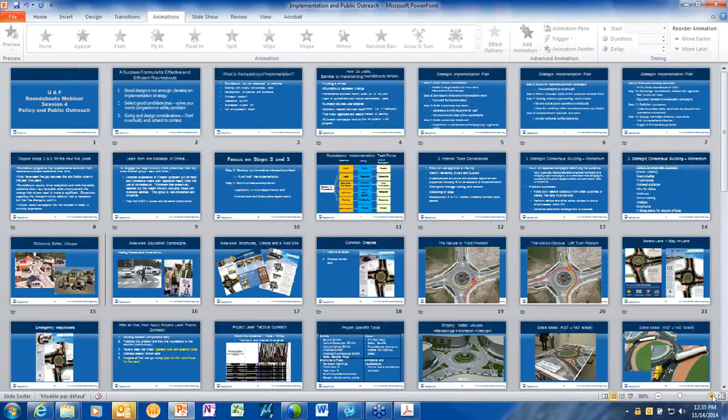I just know we had a project here, DOT did, that a local city council person kind of led the charge against. It wasn't a roundabout or anything, but he definitely swayed public opinion and got the project severely changed. You know, it wasn't good.

What would you do differently if you were the project champion? I probably would have gotten fired. Hearing some of the comments he made at public meetings, I think I would not have been able to hold my tongue.

But as you can see from this, there's ways to avoid this. No, some of your strategies - I mean, I wasn't involved in the process. This was just a DOT project and a different firm, but you saw a lot of articles in the newspapers, so I don't know exactly what they did.

It's not a large group, really, they're not just stakeholders, they're our masters. And if they're not on board with it, and they don't understand it, or they can't be your champion, then you're really pretty much on your own.

I had a public meeting, well, I won't say where it was. We went loaded with a robust toolbox. We had all the tools, brochures, videos, animations, photos, examples of sites, success stories, and we actually never got to speak. I had the microphone in my hands, but by that time the meeting had moved on, and I was supposed to get up and present on details of roundabouts, and I never got to speak.

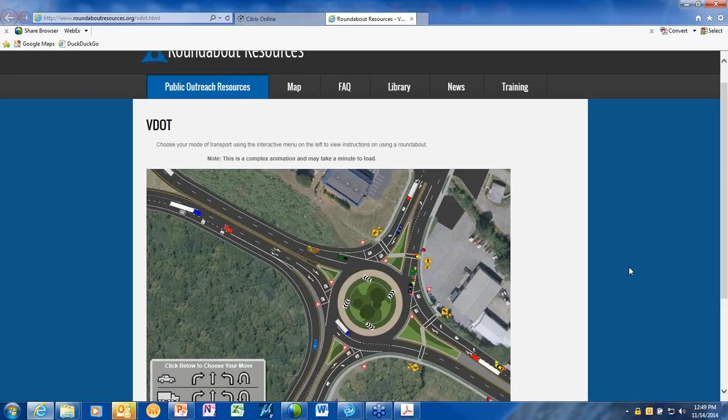We developed a website called Roundabout Resources. This is set up for Virginia DOT. It's an animation, done in Flash, and you can pick any turning movement. Let's pick the car making the left turn.

Some instructions: there comes our vehicle, he's in the left — oh, he has to get into the left lane. Pavement markings show what lane to choose. Yield to all traffic, don't enter beside a driver in the roundabout, stay in your lane, signal right to exit, yield to pedestrians.

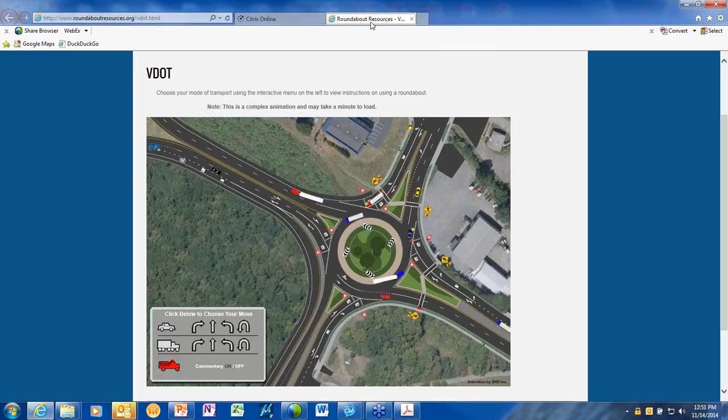So they can be fairly sophisticated. I'm just going to look at what other resources we have. These flash animations can be customized to different layouts of a roundabout: 5 legs, 4 legs, 2-lane entries, single lanes, bypass lanes. I'll maybe stop and just look at a couple of these things.

So these tools — oh, I don't have the password. We have a virtual public meeting, and it's essentially the same thing you would do in a public meeting, just all done virtually. I'll show you in a minute some of the brochures.

Turn by turn, lane choice, trucks, school buses, emergency vehicles, pedestrians, bicyclists, general information on acceptance. This material has to be well crafted and easy to read — designing it as though an engineer is going to read it is not good. It has to be simple, so the average motorist can look at the simple turning movements: right lane for right turns and throughs, left lane for U-turns, lefts and throughs. Always obey the signs — just a simple message, turn by turn.

Some of the things that websites can have as well — let's see if I can find it here — some visualizations, and I think all of you have seen these. It flips to YouTube. These are helpful at the public meeting as well as agency-wide to help people understand how roundabouts work, when they're complicated, like at an interchange.

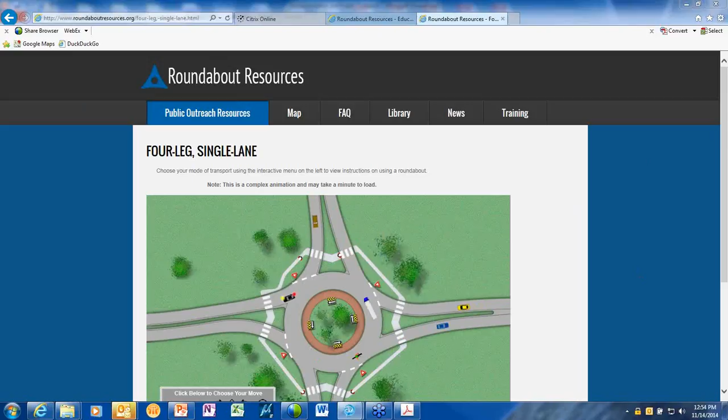Shouldn't happen if you use a road mark. Let's see if I can bring this animation back up. Well, that's not a multi-lane, that's a single lane—let's go back to the one we had. So a two-lane entry, driver's in the inside lane, driver beside them, both exiting simultaneously.

I'm not sure I understood the question. So, Mark, I think what Charles is asking is in the situation where you've got somebody on the inside lane of a two-lane roundabout who wants to exit, and the person in the outer lane is making a through movement, effectively blocking that person in the inner lane from exiting.

Well, if both drivers can make a through movement, then there should be two lanes corresponding on the exit, unless the inside lane is left-only, in which case there could be a single lane exiting. But roundabouts have to adhere to the rules of lane continuity. If there's two through lanes marked and physically present on the approach, then there have to be two lanes circulating and two lanes exiting. The only time we'll see a different condition is—let me see if I can pull some of these others up.

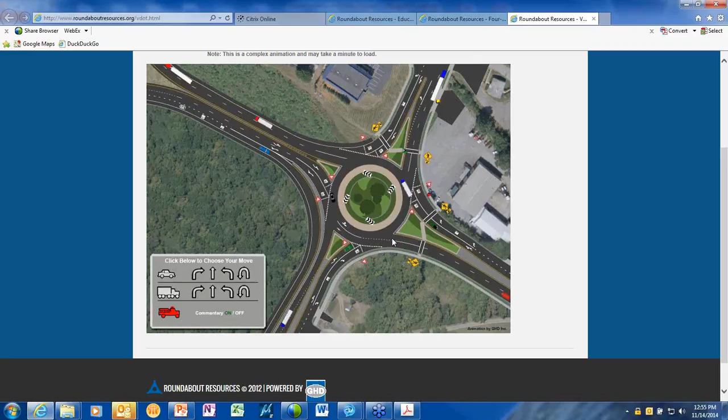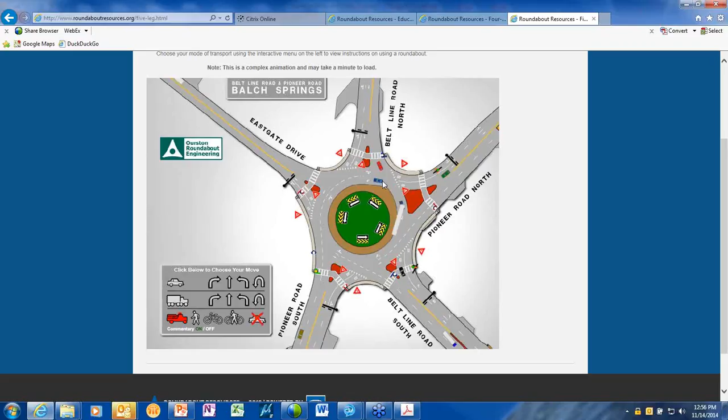I'm not sure this one's going to come up, but it's a five-leg that has not only consecutive lefts, but—here it is—the idea that there might be a two-lane entry and a single-lane exit. This was for a site in Texas when I was at Ourston a couple of years ago; we later merged into GHD. You can see that with the use of the spiral, there can be a driver in the right lane—that's actually a right-only—and the left lane can go through and exit, or go around and exit one of the other legs.

Two-lane entries from one leg can feed to two lanes circulating and two lanes exiting. But it's really important that the driver in the right lane not try to make a left turn, and the markings help to reinforce that.

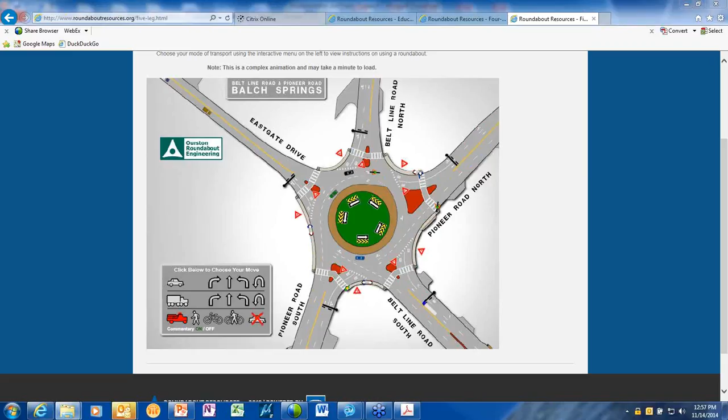I think what Charles was getting at, Mark, is someone who inappropriately makes either a left or a through movement in a two-lane roundabout by choosing that outside lane. It happened quite often—I grew up close to Augusta, Maine, which has two of what used to be called rotaries, and it would happen all the time. Somebody would be in that outside lane continuing through, and somebody on the inside lane wanted to exit. Either that person is forced to circle around the roadway again, or they slam on the brakes, come to a stop, and then try to accelerate their way out of the roundabout.

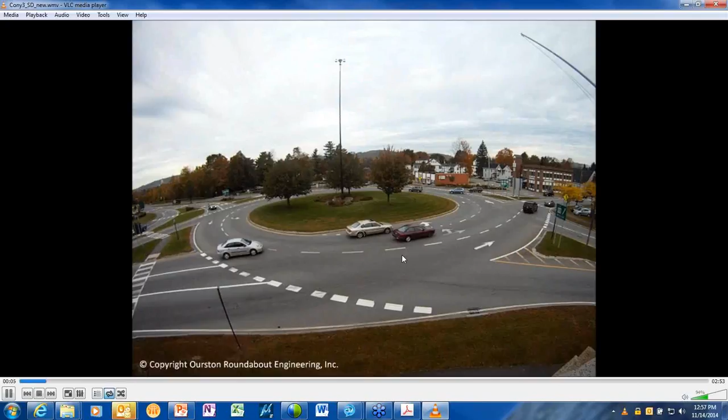Okay, that's the one, Cony Circle, Maine. This was an unconventional rotary or traffic circle with no pavement marking and striping, and what marking it did have was not uniform with approach lane designation and exit lane continuity. In this case, you can see a left turn, left-only, where the inside lane is going to exit either at Stone or—I can't remember—Cony.

This is Memorial across the bridge, and these two lanes take them through. The driver can't make a left from the right lane without crossing the lane line—that's possible to do, but they have to turn signal. This is a double left, so this driver came from the inside lane and they're spiraling out. There's a spiral, this paint mark spirals them out to the exit.

Now trucks do pretty much what they want. They're big. That's a common scene, cars stopping in the entry for a truck. It's so difficult for them to start up, and once they get started, by that time 3 or 4 vehicles have come around. They had a gap when they began, and there's none after they entered.

So the striping should be educational, but designs like this require a lot of community outreach.

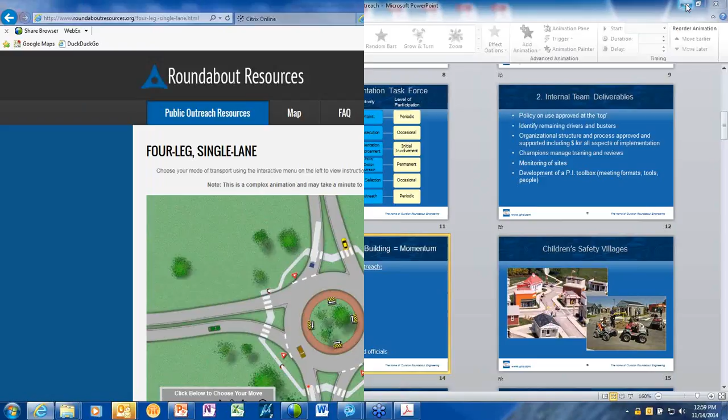So there's a lot of education material. We'll talk a bit more about that. I'll just leave that website up and running for now. So we were talking about the tools of public outreach.

All these things can be posted to websites, and they can be reused at the public meeting. The brochures can be pulled off, printed, and distributed. You can prepare talking points, bulletins for elected officials, the kind of thing that precedes the meeting, so they know what to expect when they come. Don't take that for granted.

They won't admit it. This one's kind of novel—the idea of a safety village, but instead of teaching children how to cross at signals like these safety villages do, it's putting them in little ATVs and getting them to go around the roundabout.

This is actually the same intersection that's been converted to a roundabout. It happens to be in Canada.

The other idea of an area-wide campaign is to make pedestrians more assertive. In our last session, we talked about pedestrian safety and the idea of being assertive. So the photo on the left is of a councilor, and all of the council was put on a bus, taken out to 5 or 6 multi-lane roundabouts, and they were taught to cross by pointing their hand. Some of them tried to cross without pointing and they couldn't get a gap. As soon as they raised their arm, things changed.

Over in Loveland, Colorado, they had a Look at Me and Look Smart campaign. Kids were learning—this was not roundabouts, but just all crosswalks.

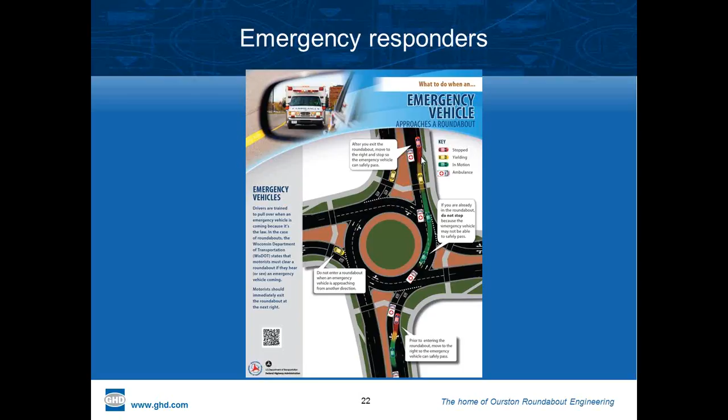Emergency responders and how drivers should behave: they should exit the roundabout and pull to the right, let the ambulance go through. The ambulance driver should anticipate that that's how they're going to do it. So there's some education, really, not just for the responders, but the rest of us.

Once we've got some of that area-wide outreach and the campaign is underway and things are on the website and we're ready to go, we want to start by developing the project components early.

So Tom was gracious to share his upcoming experiences, and so you can ask questions about how well informed the legislators are, how well informed the rest of the department is, who's the champion, how many champions can you bring with you.

Publicizing the problem at the intersection, whether it's congestion or safety, is important to do continuously throughout the outreach process—the first meeting and the last meeting, before construction and after construction. So you can remind people of what would have happened with the alternative control and what would have happened without any change in control.

Have lots of tools—general tools, area-wide type tools, and then project-specific. Remember the storm cells? Poorly operating roundabouts need to be addressed before you go to the next meeting. Otherwise, they dump on you for the last roundabout and don't let you do the next one. Plan for the worst, hope for the best.

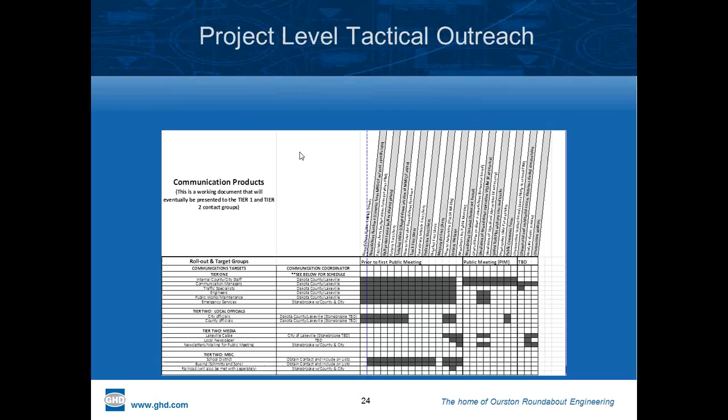So the tactical level, project level outreach is about matching the audience, the tools, and the timing. There's certain tools across the top, everything from brochures to animations to public handouts to television spots and newspaper press releases. Each of these has a proper place and a proper time.

So if we start with the audience of elected officials who need to be informed to give us the authority to do this, then we put certain information in their hands. Then you begin to build momentum top-down through the media, because they'll print news if you don't give it to them, and down into what we call tier 1, 2, and 3.

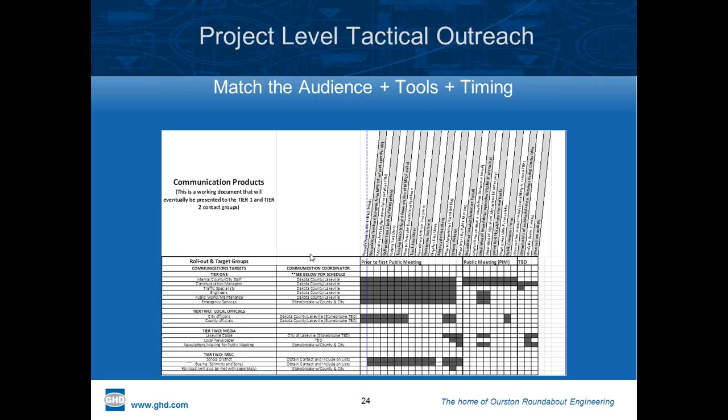General public is the last audience to be reached. Everyone else has to be engaged before that. That's a very effective top-down and internal-to-external approach.

Here's your project-specific tools that you bring to the meeting: exhibits, videos, animations, brochures, how-to guides, crash exhibits showing what types of crashes can occur, some statistics from the Insurance Institute and videos from them, things that give you area-wide or statewide benefits of roundabouts based on publicized before-and-after studies, how to use a roundabout, flash animations and visualizations.

Your toolbox is full if you've got all these ready to go. But without the authority to do what you're doing and the support and momentum—we've gone to meetings with all of this and still failed. So we said it wasn't for lack of information that we didn't get to where we were going.

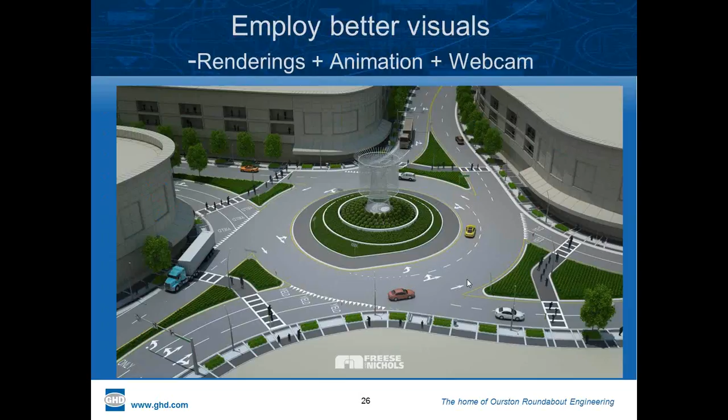So use better visuals and animations. This is a photo rendering of a future intersection with 3-lane entries in Fort Worth, Texas—a big roundabout plan. You're concerned about pedestrians, and they should be. 3-lane entries, it's tough to cross.

Use a scale model. This just happens to correspond to scale model cars and trucks that fit the railroad scale of HO model railroad, 1:87. We plot it in paper or vinyl, and then we have the ability to actually see the space of the scale model within the roundabout. That has helped our truck driving community so much—we don't go to a meeting without one of these.

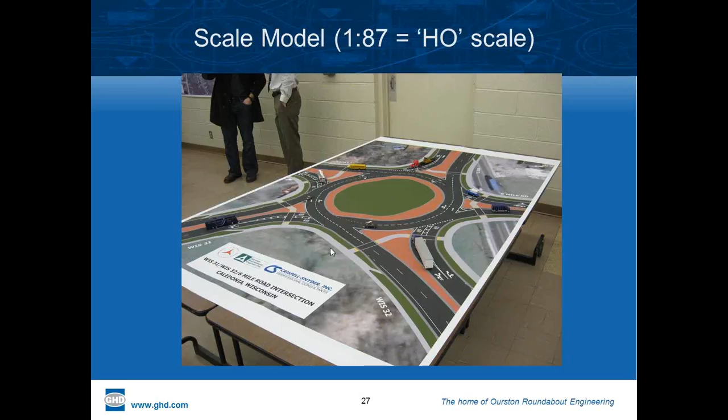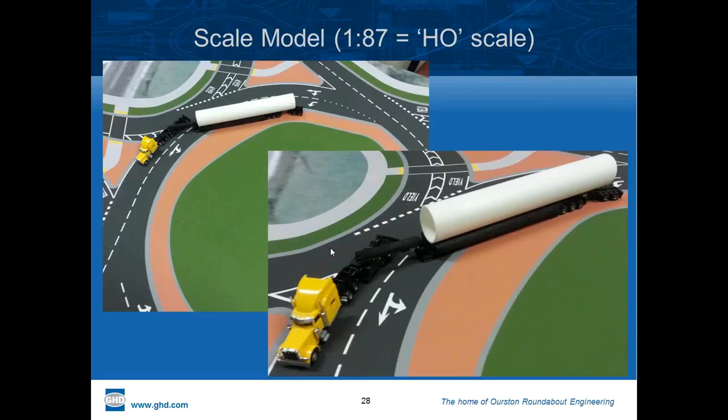And we even went to the trouble to design and fabricate a wind turbine showing the oversized vehicle and how it's going to track, inside and outside.

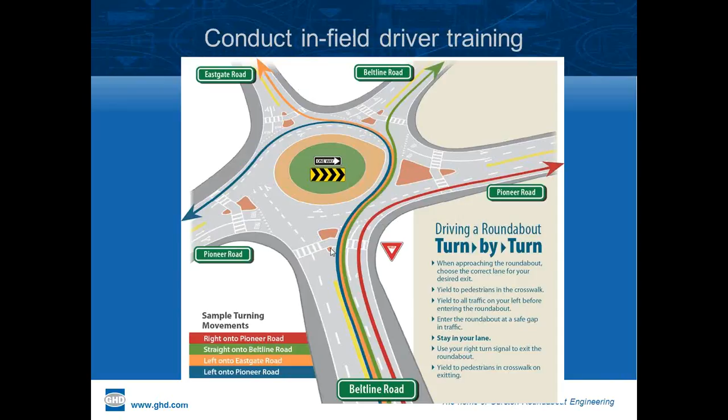The in-field driver training before your roundabout opens. Use cones, use flagmen, hand out brochures through the window, get people to learn how to drive it, before you cut the ribbon, and continue with enforcement and encouragement afterwards.

This was a project in Dallas. We took the 2-lane entry down to a single lane on the approach and then let it widen out. Gave the brochures out through the windows on all 5 legs, and then the driver basically had a laboratory to enter which lane they felt was the correct one, reading the signs, looking at the brochure. It caused a bit of congestion, but 400 roundabout brochures later, people are coming back and saying, I need to give one to a family member. So it caught on very well.

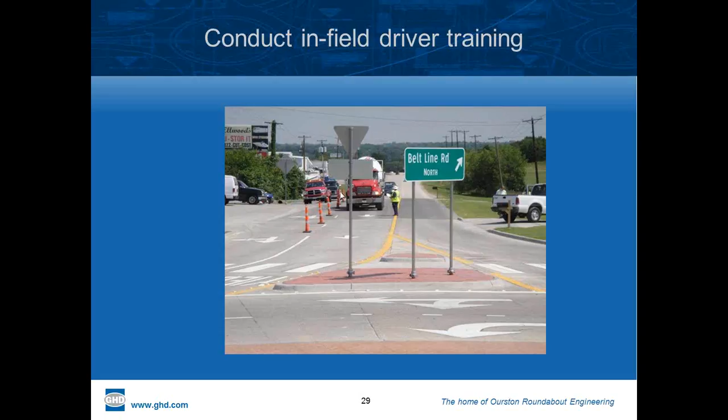And then have a grand opening, celebrate your success, and make sure the cake is round.

On to a case study. I'll stop at that point. Nathan will take comments and questions. Big session on public outreach.

Sure thing. Any questions?

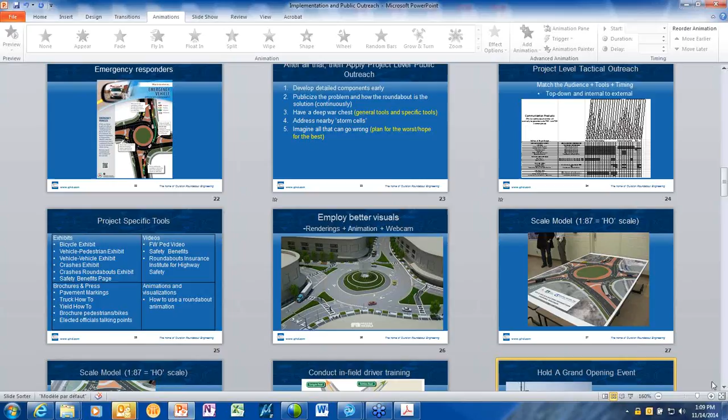All right. There was a lot of talk about the whole left turn and right turn. Who yields in that situation? If a person on the inside lane is trying to make a right turn out of the intersection and there's a person immediately to their right, are you supposed to yield to the person on your right and wait till they pass and then go? Or is the person on your right supposed to yield to you as you exit?

That may not have made any sense. It did. The driver in the circle, whether or not there's lane markings, the driver in the circle has the right of way. Doesn't matter whether the driver in the circle is on the inside or the outside lane. The driver entering has to yield to circulating traffic.

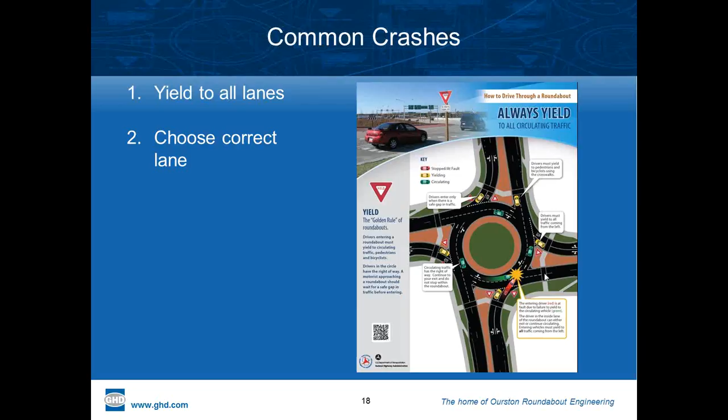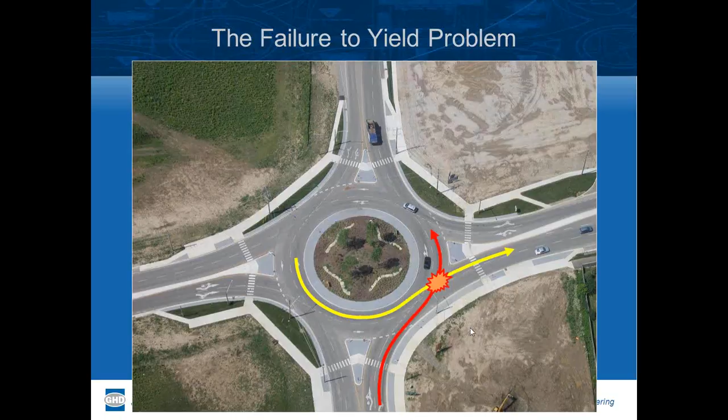Can you go forward 2 slides? So that's a failure to yield. It's probably -- how about the case after that, though? Yeah. So in this circumstance, the driver entering has to yield, but in this one, they're both already circulating.

Well, it's an incorrect lane change, isn't it? And it's also choosing the incorrect lane to make a movement. So the driver is not in the leftmost lane or in the left-hand side of the roadway in order to make a left turn.

Okay. So in entering a 2-lane -- sorry, go ahead. Even if the driver -- even if there were no striping in the circle, and there were proper lane designation on the approach with black and white, the policeman would have reason to give the driver in the red path a ticket, probably $100, and 3 points for an incorrect lane choice and failing to yield.

Because the driver on the yellow path is okay, has the right of way to exit, and if they collide with the driver circulating and wanting to make a left, then the driver circulating and making a left is at fault.

Okay, so in a two-lane roundabout like this, the right-hand approach lane is meant for a right turn, and the left hand is meant for a through or a left? No, both lanes can make a through movement. You see this red vehicle can make a through movement. From the upstream condition, there's through arrows, and there's a left turn arrow on the left lane and a right turn arrow on the right lane. Okay, all right, it makes sense now.

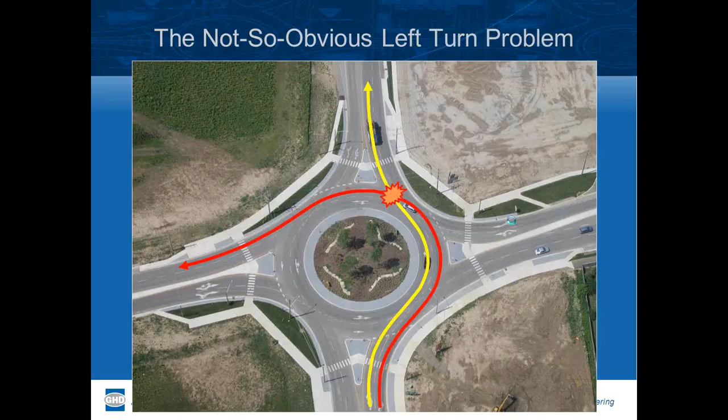And these black and white signs are then essential, because if the driver does make the left from the right lane, the policeman has every reason to cite them. So sometimes we use them overhead. Sometimes ground mounted on the lateral on the right hand side. If there's a median that's wide enough, put them on both sides.

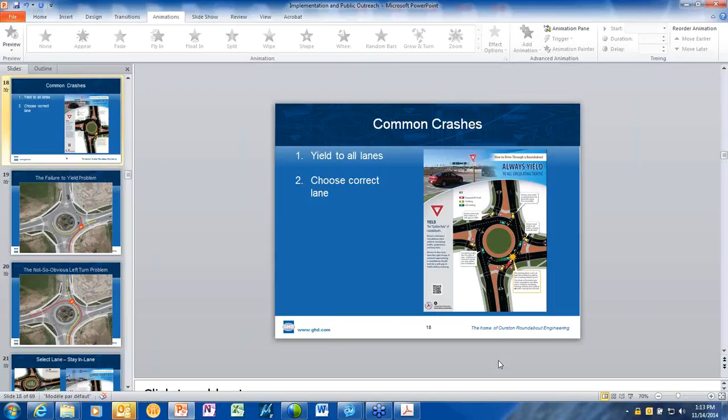Okay, I'll take you through a couple of case studies that address these very issues. So Wisconsin, and this ties back into the roundabout campaign. So they've got a couple hundred roundabouts, lots of multi-lane. They started the safety study back in 2007 when there was already about 100 on the system. Looked at some 3 to 4 years of crash data before and after. And they're in the current phase right now, and I'll step you through the study and what it's revealing.

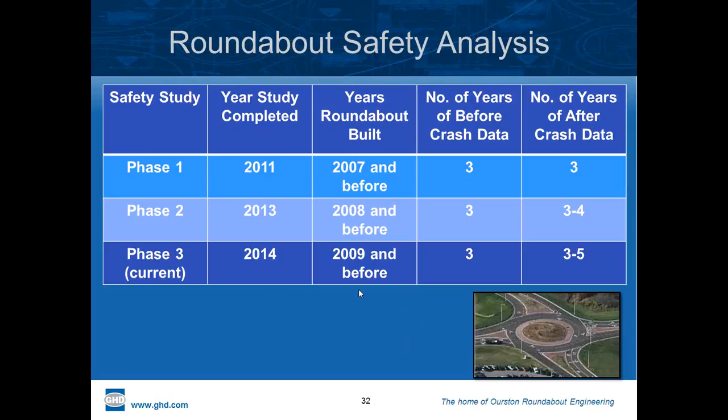As of 2008, they had 40 roundabouts within WisDOT, and 30 were included in the evaluation. So 6 years ago, that was doubling almost every year. They're over 200 now.

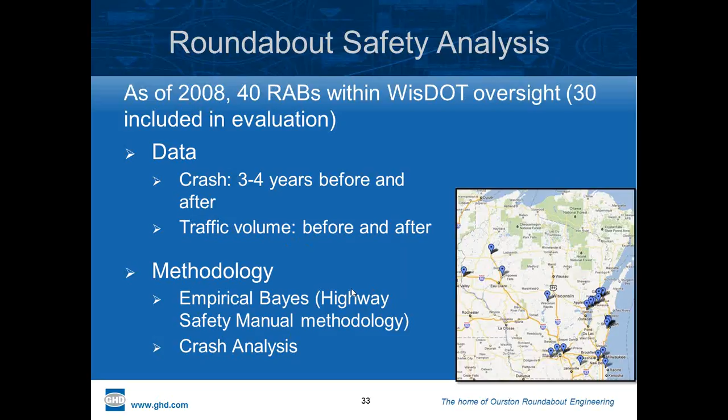In the 3 and 4 years data before and after, they used empirical Bayes. They also used a simple before and after analysis for comparison. They saw a significant decrease in high severity injury type crashes, but an increase in low severity crashes, particularly on the multi-lane.

So that's a little frustrating, because we thought roundabouts were all about safety. Property damage doesn't imply personal safety, but it does bring up the question of property safety and security, the sense of safety. Mark, does property damage include things like people taking out signs at the roundabout?

Yes, I presume that's included. Single vehicle crashes, anything that's reportable. These are reportable collisions, so there's likely other single vehicle crashes, especially with alcohol involvement, where they end up in the central island and find a friend to get them out of trouble before police show up.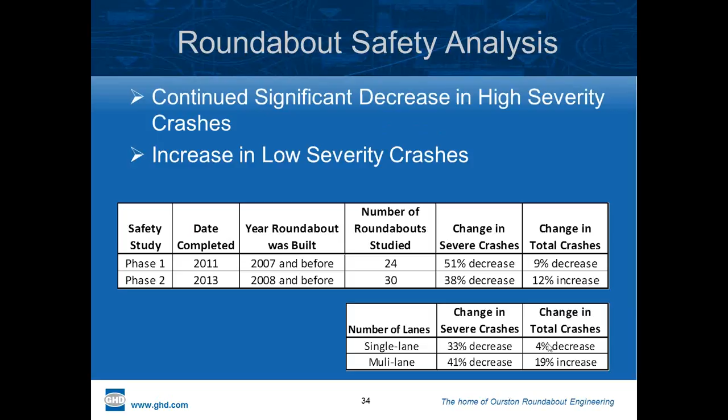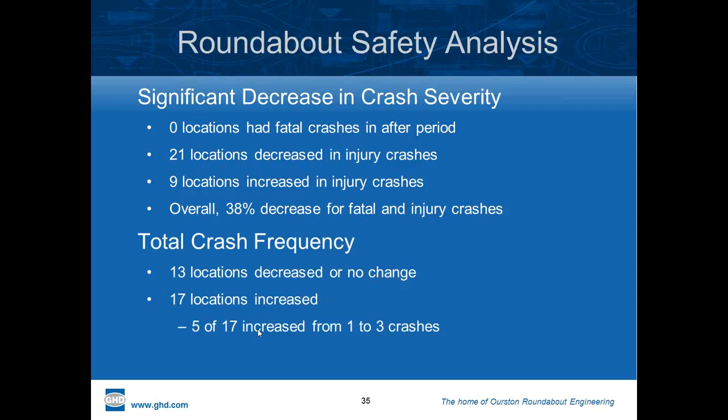And examining roundabouts in those latter two phases of study that did not perform as expected, to see if there's any contributing factors, any common variables, and then initiate a campaign. So look at the designs, look at what might be happening, but continue to educate at the same time. In the event that it's not design but education, at least you cover both.

So the statewide campaign is going to use TV, radio. Some of this is already underway, addressing the primary causes of low severity crashes, which is failure to yield, side swipes, exit crashes with incorrect left turns.

They produced this video that uses the concept of a record circulating, and you can see it on the Wisconsin DOT website.

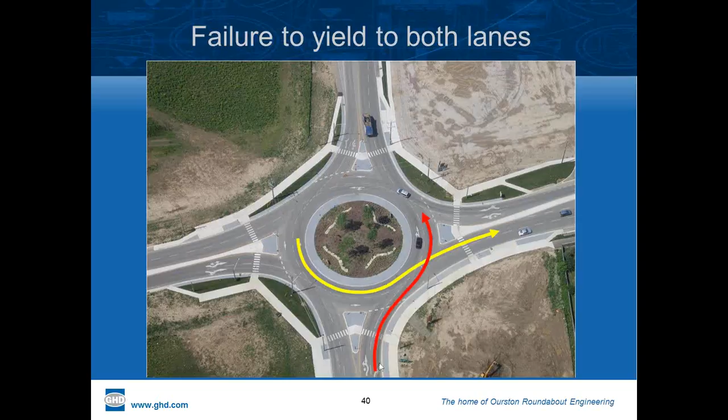The commonalities between roundabouts that have safety concerns are again the failure to yield and the incorrect lane choice. They're the overrepresented crash patterns. As we saw, there's the failure to yield, and the most common failure to yield is the right lane and the inside lane exiting, where the driver in the right lane should yield and wait just long enough.

Let's see what that looks like. This is a Michigan video from a few years back. Let me see if I can get it up here.

Watch the failure to yield, right lane here, inside lane exiting. The van will pull up, and the car will circulate. So he's looking for a gap, and maybe he sees a little gap here and doesn't realize that snowplow driver is going to exit.

There's property damage, but it's frustrating and somewhat of a nuisance for all involved, and folks who have to deal with a little congestion while waiting for the wrecks to clear.

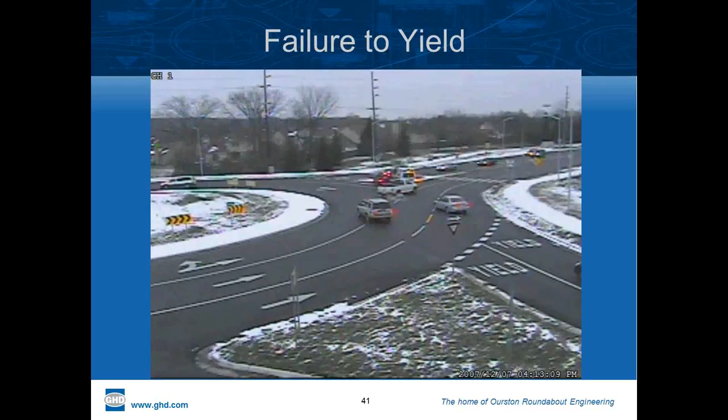A little different illustration, roundabout in Minnesota. I took this video and wasn't there for 10 or 15 seconds, to watch a conflict pattern, and sure enough, a common reoccurring problem.

Courtesy on the part of the driver in the gray vehicle not to collide with the white minivan, but he had the right of way.

So is it gap seeking? Is it driver adaptability? Is it incorrect perception because of the presence of lane lines? Is it all of the above? So we have to roll back some of these issues to figure out what's going on, because these problems aren't going away.

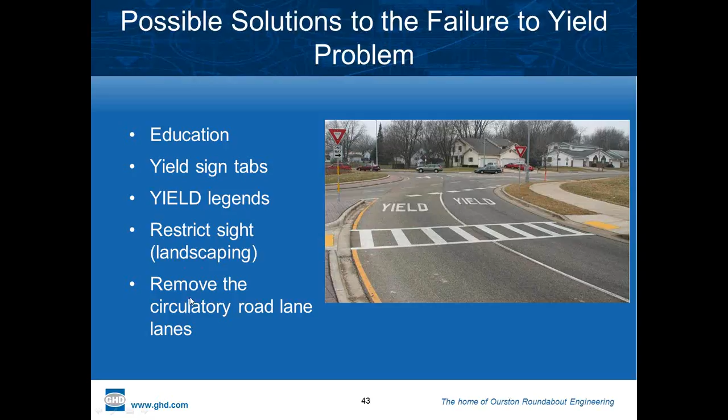Some possible solutions: better education, that can't hurt. Put tabs in the yield sign, yield to both lanes of traffic. There's one on the right, with the word 'yield' in the entry area. Restricting sight - I have a case study I want to show you from Madison - restricting sight to the left. And removal of the circulatory roadway lane lines.

I'd just like to take a straw poll. How many of you believe that this conflict would not occur if there were no lane lines in the circle? Nathan, take a vote. How many in the room think that conflict would be eliminated if we remove this lane line?

We've got Mark, one person saying it would solve and make the problem better. We have two saying it would make the problem worse, not having lines. Not that you necessarily wouldn't correct that issue, but you'd have other problems arise by not having lane lines. Well, then let's be specific - what problems would arise?

Just confusion between drivers - is it a multi-lane roundabout or a single-lane roundabout? Yeah, and in Alaska, people 8 months out of the year make their own lanes, and the lanes are designated by the ridges of snow in between them, not by what the stripes are. So not having stripes might actually not make a difference, depending.

Okay. What about the left turn? What about the left turning driver, if there's no paint in the circle? So let's take the comments. If it's a two-lane approach designated and there's markings that show two through lanes, what makes this different from a signalized intersection with a left turn and other through or right lanes?

Anyway, that's a thorny issue. You can see I have some ideas about it, but I also believe that striping is beneficial in some cases - in fact, essential. Let me show you a case where I think striping is essential.

This is a web camera. It's live. You can get it to come up here.

There's the queue on the approach. It's a double spiral design. It has to have lane discipline because of the wide circulatory roadway. This one carries about 5,000 cars per hour in the PM peak.

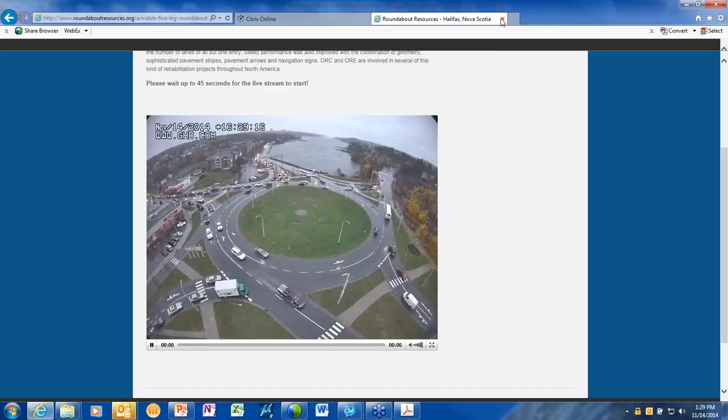So it's only some of the simpler designs that are receiving pavement marking, or not receiving pavement marking.

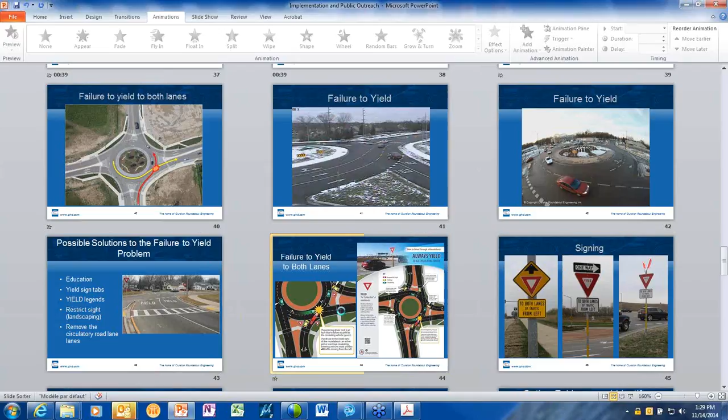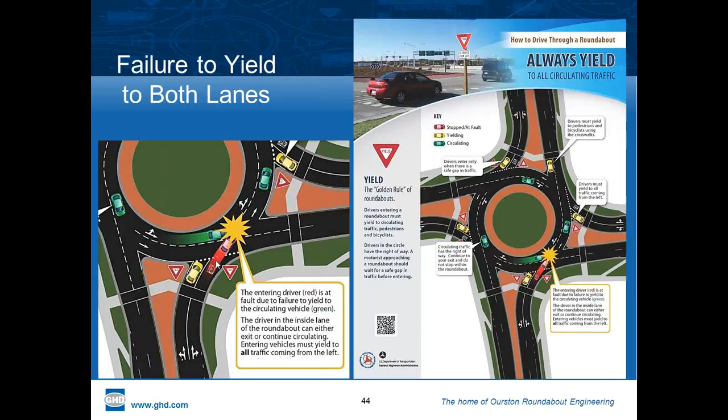So we saw that failure to yield collision. We're working towards improved education, where the driver in the right lane understands that they're at fault if they enter and circulate beside a driver in the inside lane exiting. So we see tabs on the signs, yield to all traffic from the left, from both lanes, to all lanes, to both lanes. Different treatments.

This is the study on some failure to yield type collisions. The before condition for this roundabout location is a T intersection, set up for a fourth leg of a realigned roadway coming through.

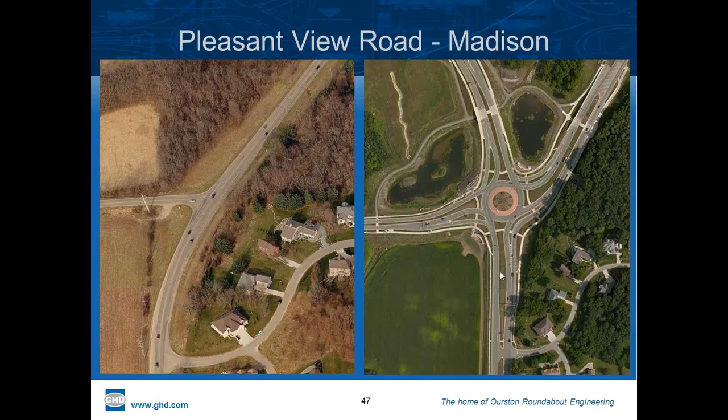A very large 2-lane roundabout, with bypass lanes: one direction partial bypass, all 3 other directions full, expandable to 3-lane entries. It opened maybe 4 years ago. Some crash evidence of a particular kind: failure to yield.

What does it point to? Is it poor geometry, marking, signs? Is it education? Should there be more enforcement? A field review was necessary, and some conflict studies were undertaken to look at driver behavior.

This is the crash pattern for 2011, mostly entry-circulating collisions, failure to yield. Driver entering, a lot of them in the left lane. Not all was mapped correctly, but on several approaches, predominantly on this one. And we went out to the field to look at that site.

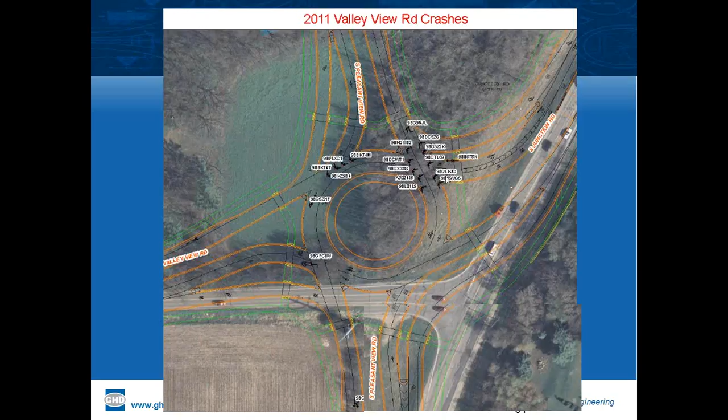2012, similar pattern. An intersection not far from there had a similar problem with failure to yield, exacerbated, slightly higher frequency in the following year. Overrepresentation of entry-circulating, failure-to-yield collisions, not just approach speed issues, but outright failure to yield.

Looking at driver behavior, we discovered the sight to the left is too generous. We don't have research to point to a correlation between entry-circulating crashes and sight to the left, but my hypothesis is that screening and restricting sight to the left will help. The early evidence from this site is indicating that worked.

And of course, education and enforcement can help. It's part of a good traffic engineering diet: the 3 E's of engineering, education, and enforcement.

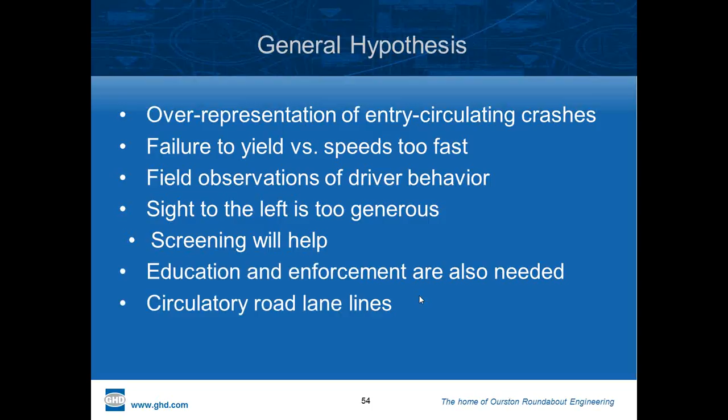And the question about circulatory lane lines: we made a choice at this stage not to recommend changing the striping pattern, but just to work one variable at a time. Remember the failure to yield collision we looked at? That's what was occurring here, but at higher speeds. So drivers coming up the approach—you can stand here, just upstream of the crosswalk, and look at the drivers, and they're glancing and sighting, but they're making 2 glances.

The first glance to the left is at about this position, the second one is around the crosswalk, so they turn their heads. You can record that on the clipboard. About 1 in 10 drivers would only sight to the left once—they'd look left here and go all the way through without sighting to the left again at the crosswalk.

Now, if a vehicle appeared, or they misjudged the path and speed of a vehicle in conflict, and they only looked once, there's a very good chance of a crash, or at least a near miss.

So the ideal sight is really down to about this level. In the British Roundabout Guide, they have sight to the left from 50 feet upstream to only the upstream entry. In our Federal Roundabout Guide, we have sight from the vehicle upstream in the fastest path through the roundabout to a driver from the left also in the fastest path through the roundabout—so it's just about the red line. We've always felt that was excessive when you compare it to the British Guide, which has been in circulation for close to 30 years. If it was a problem, you'd think they would have addressed it a long time ago.

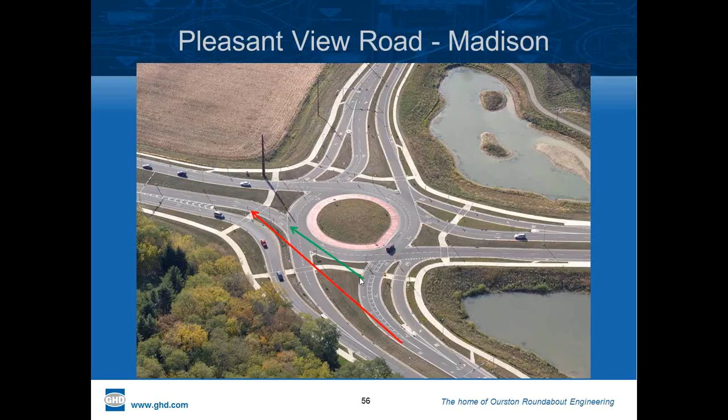So you can see traffic all the way around the circle, coming in, entering, circulating. It's generous, and it seems to be a contributing factor.

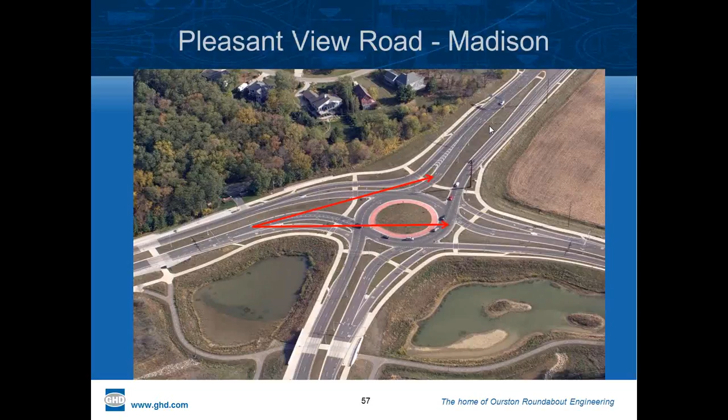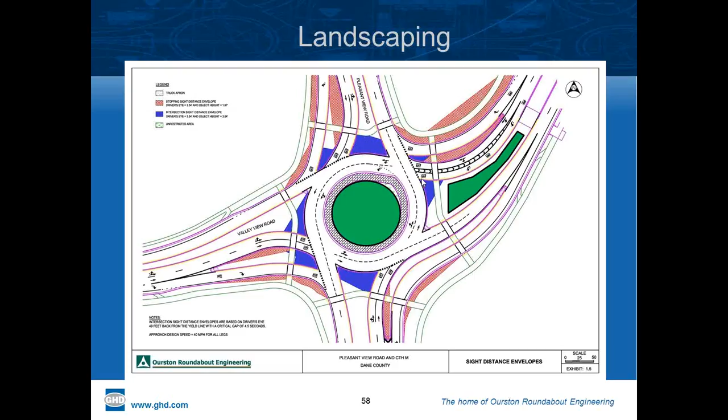The landscaping wasn't very well developed at the time it was open. You can see there's just a lot of green, all grassed and sodded, and nothing really in the vertical dimension, maybe a little bit of mounding on the central island, but not much. So the addition of screening plantings here and a little bit more on the central island tend to restrict the sight just sufficiently so that drivers could only look upstream to the entry point.

My recommendation was a row of spruce trees, maybe a little tighter than this, and I suggested even that they use snow fence to start with just to prove the point, and they went ahead and did this without trying to do a test of any kind.

So within days there were phone calls at the city of Madison saying, 'I can't see to the left,' and the city's reply was, 'and that's a problem?'

So the crashes have been reduced in about a year or so after. They'll collect them a few more months or maybe another year's worth of data before they report.

And so you can see from either direction that your sight is intermittent at best. Left turns from the rightmost lane.

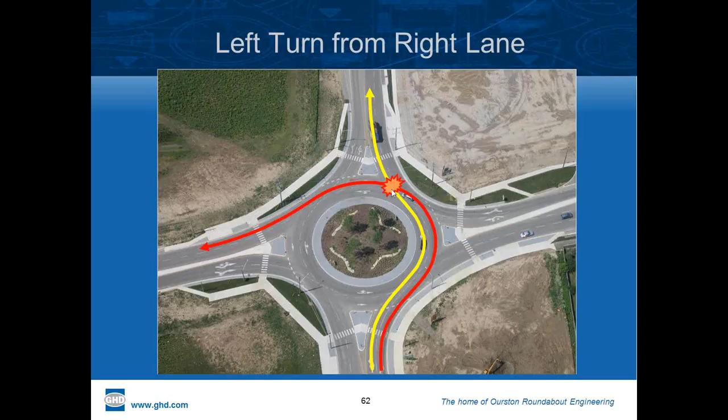Here's our conflict with the exiting driver. Regardless of what treatments are on the approach, some drivers will still elect to enter and make an incorrect left turn. And the kind of things that we see are typical of what's in this video. Let me get that working for us here.

You see the lane markings, through-left from the left lane. And there goes our FedEx truck, going to be late today.

It's kind of like the pit maneuver. Let's see that again.

So the white van had the right of way to exit. And the car in the left lane had crossed the lane markings either without signaling or just cut off the vehicle. Now this is a case where striping is pretty helpful because there's a lot of space there. And somehow that wasn't enough, even with the solid lines.

Perhaps the driver waited till the solid lines opened up to a skip white and then made their left, which would be... yeah, that would be kind of discouraging. You go to all the trouble to paint it and then the driver still makes the left when the lane lines open up.

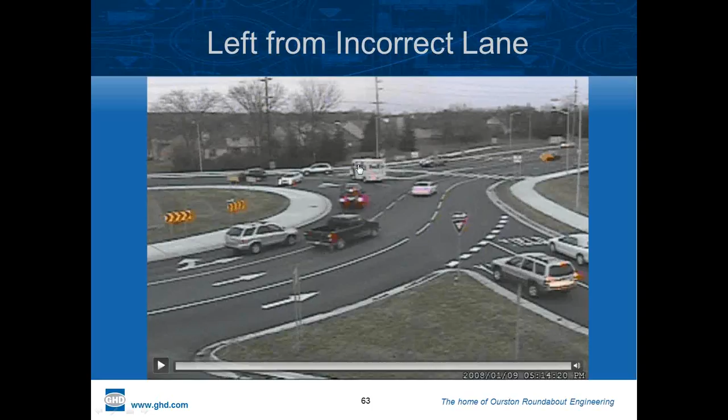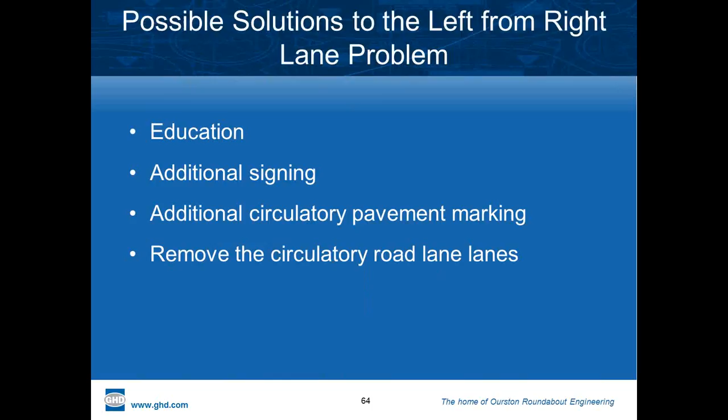Solutions, again: more education, could be additional signing. We don't do a great job on approach signing for lane designation. Possibly additional circulatory marking, and in some cases on 2-lane roundabouts with fairly compact circles, you could remove the stripes and they would operate with a lane and a half or a little less capacity, but they'd likely work safer. And there's some education brochures that can help with that process.

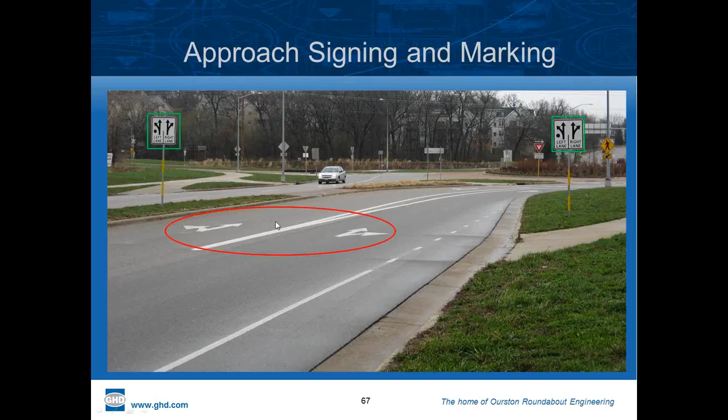Some definition, left and right lane, reinforced with regulatory signs. Sometimes in duplicate, left and right hand side. Pavement markings in duplicate stream, reinforcing that lane choice or incorrect lane choice.

The site in Richfield, Minnesota, where I took the video of the two vehicles interacting: when circulating or exiting, they chose to take the solid white and make it skip, and they chose to extend the solid white from the approach well up into the entry area and add a second group of lane markings. They've seen a benefit in conflict and crash reduction, particularly for that left turn from the right lane. They realize once they're in that right lane and they see that second set of stripes, they're not going to make a left. And where this condition perhaps makes it a little more casual, this seems to have helped to reinforce it.

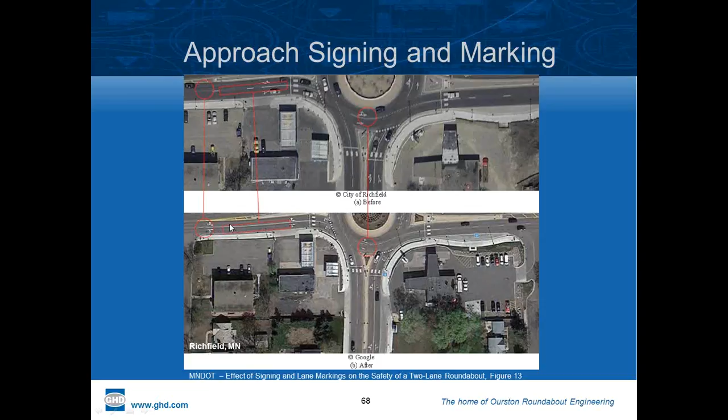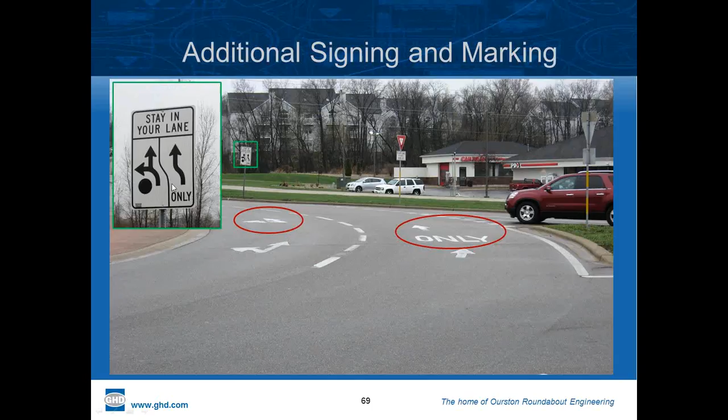So it wasn't a double left, it's a single left. So 2 throughs and...

Okay, that brings us to the end of that material. I hope you found that informative. I had fun talking about it again, especially the public outreach. We've got a bit of time for questions, otherwise we're finishing a few minutes early today.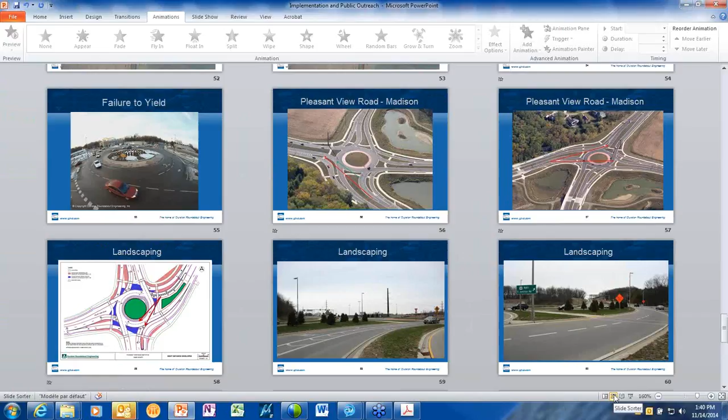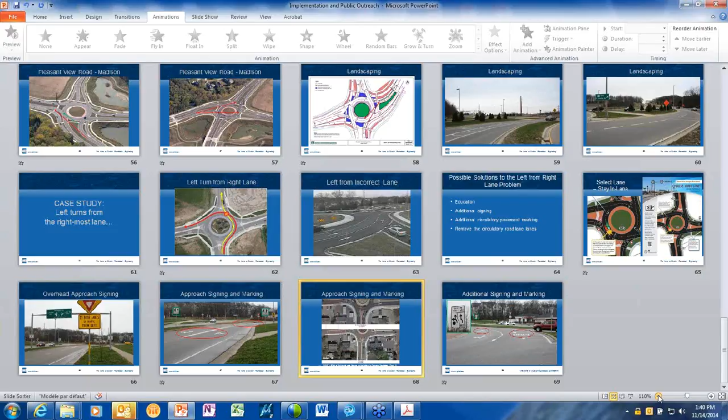Any questions? This isn't an outreach question, it's a design question. I wasn't here for that. But how do you handle super elevation in roundabouts? Okay, are they sloped inward?

Particularly for trucks, we tend to go with the inward sloping halfway across the cross-section. Let's find a typical here.

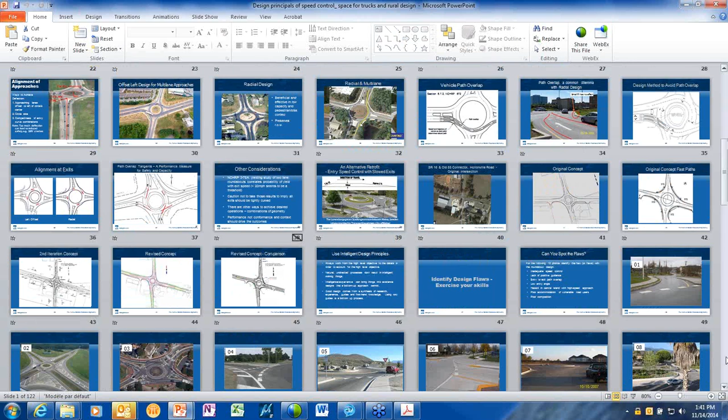So this has become the common typical cross-section, and it tends to be associated with oversized, overweight vehicles because the flatbed or lowboy OSOW vehicle can snag on the apron. So the tendency is to go with a rolled crown, put a catch basin at the tip of the circle like a plate in the intersection area, rather gentle or not so abruptly tipped, and set a double catch basin at the low point, then crown the circulatory roadway and drain it 1% away from the truck apron to keep a prominent central island, and then split the drainage.

This is a 1/3, 2/3 configuration. If it's two lane circulating, I would put it at the crown point at the midway across the traveled way, so one lane is on one side of the crown and the other lane's on the other side of the crown.

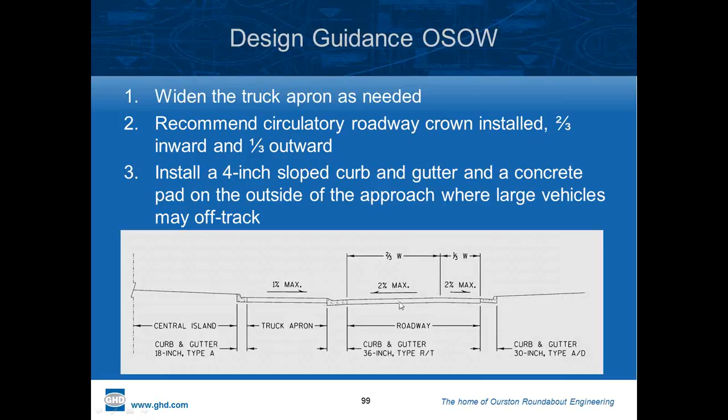Some single lane roundabouts are still sloping 2% out, all the way to the outside, but with trucks tipping and the potential for trucks snagging on the truck apron, this is an emerging preferred cross section. All right, thank you, that answered my question.

Okay, so Tim asked, with such a low speed in the roundabout, wouldn't he'd go with a normal crown, no super needed?

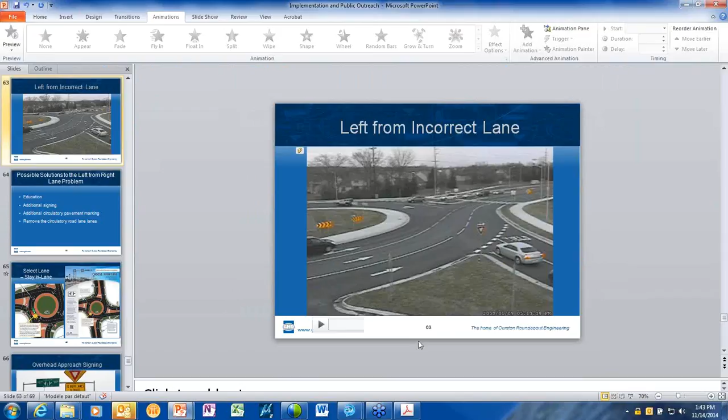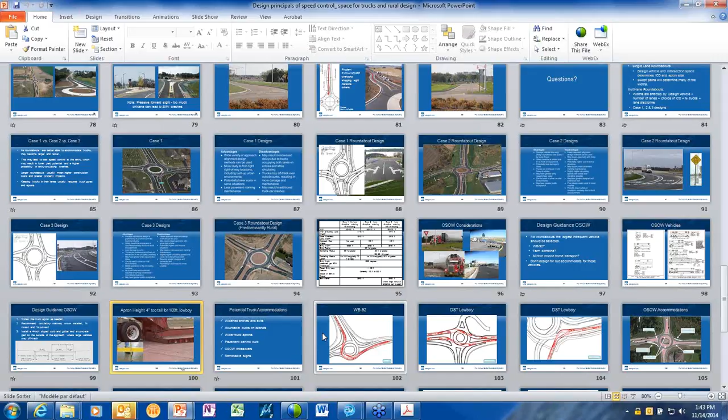You would think so, but maybe this isn't one of the better examples to show. We'll go back to that truck. One of the issues that's come out of British design practice, and I don't know if I have it in this set of slides, is that one of the problems that develops on high-speed approaches is that the truck, if there's a series of reverse curves, goes through a swaying action, and making the left turn, we don't want to disadvantage the truck further by having adverse crossfall.

So having the slope of the circulatory back to the central island and then outward produces kind of a rolled crown affair instead of a knife edge - it's a parabolic surface where in asphalt it's essentially a flat crown. So you don't get the back and forth effect, and that seems to set up better for trucks entering and circulating.

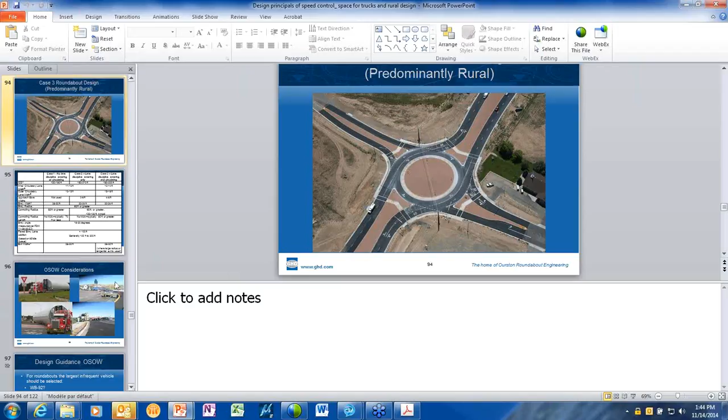In the British Roundabout Guide, they've used the rolled crown for close to 30 years. The guide's gone into 2 publications, and on separate occasions they've reinforced that that's good design practice. It seems to mitigate some of the rollover potential. If it's done correctly, it's very subtle and almost undetectable.

Let me see if I can show you a roundabout video with some... no, this is just not going to cooperate. Sorry about that, I thought I could move it ahead, skip the logos.

So in terms of lane continuity, the inside left is left only, and the outside is exiting. So from 2 lanes to 1, the approach markings are essential. Otherwise, drivers will cut across this lane line and try to exit and cut someone off in the outside lane.